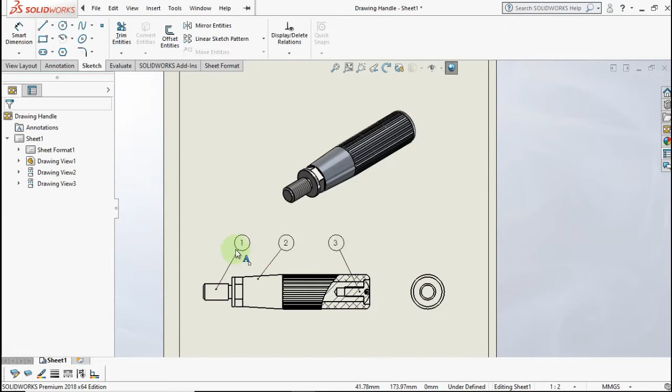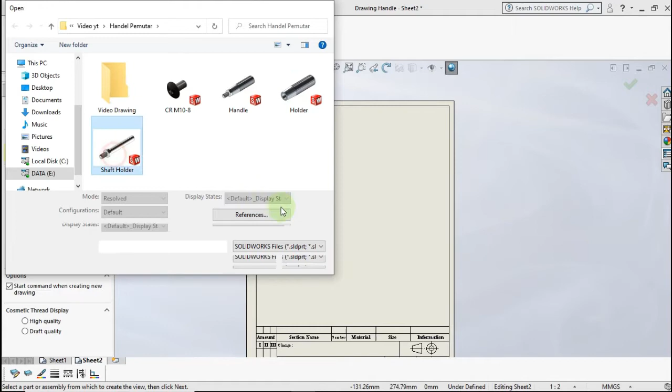In this video, I will show you how to make a spin handle drawing in SolidWorks. First step, make a new sheet. Click Model View. Click Browse. Insert the Shaft Holder. Make the view scale 1:1.

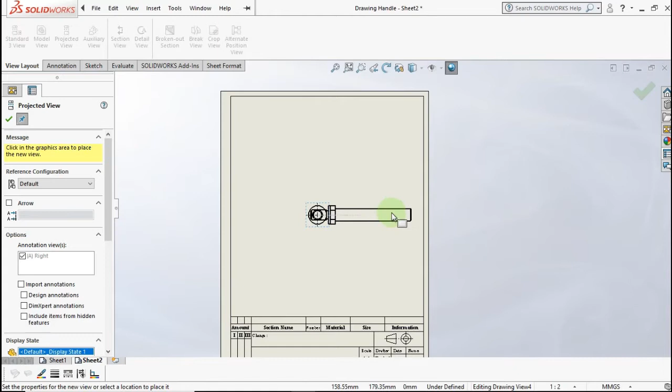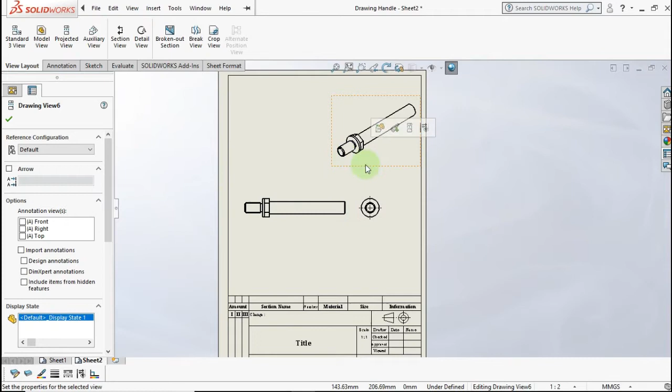Click Front View. Click Right View and Isometric View. Drag the right view to the left of the front view because we use European projection. Click Isometric View, make the display style parameter shaded with edges.

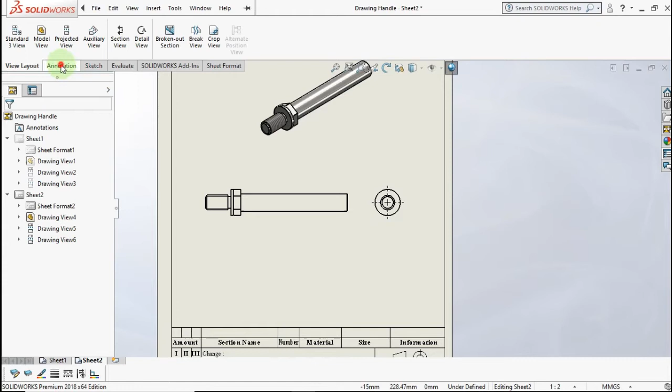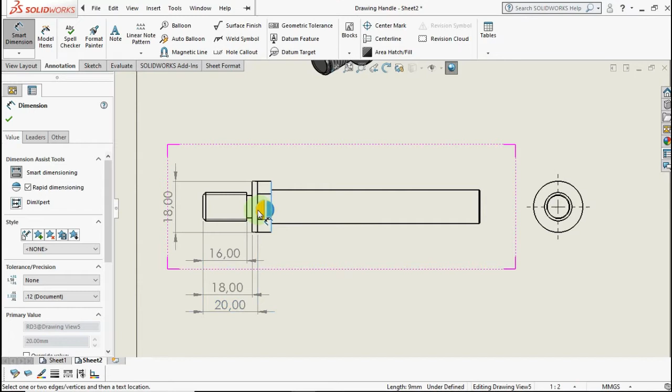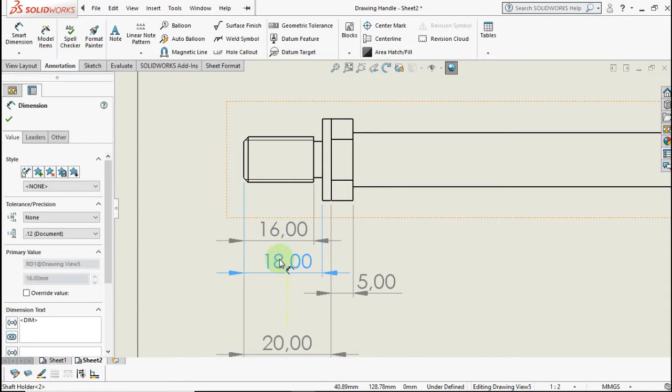Go to Annotation, activate Smart Dimension. Give the size of the parts that need to be dimensioned. Tidy up the dimensions so they are nice to see. Remove the zero after the comma.

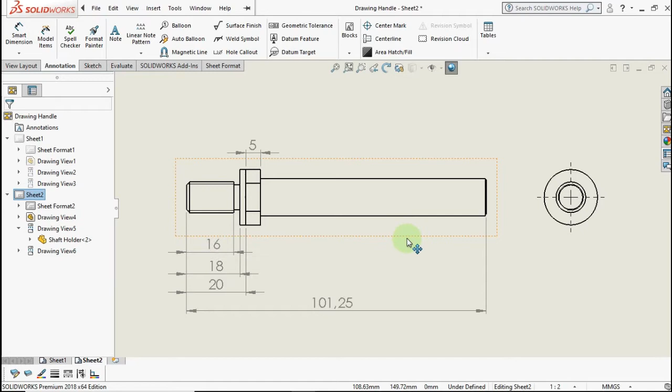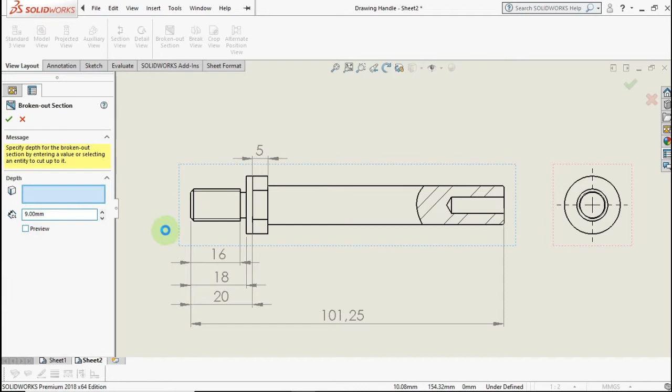After that, go to View Layout. Activate Broken-out Section to see the thread hole. Make the depth parameter 9 mm. OK. Activate Smart Dimension. Give the size of the thread.

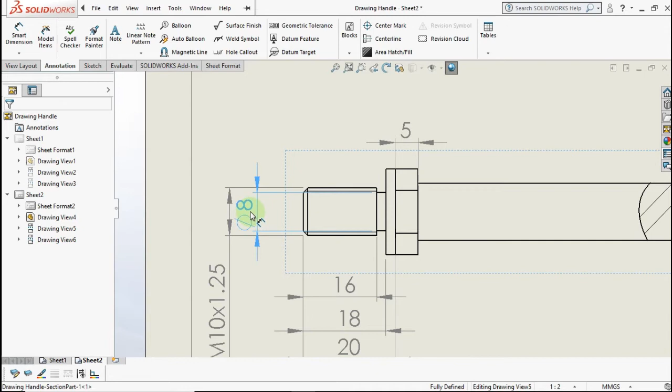Because this part is a thread, we will change the size value to M10 x 1.25. Click this size. Because it is the size of the shaft, tolerance must be given. Choose fit with tolerance. Choose G6 for shaft tolerance. See, the shaft tolerance is showing.

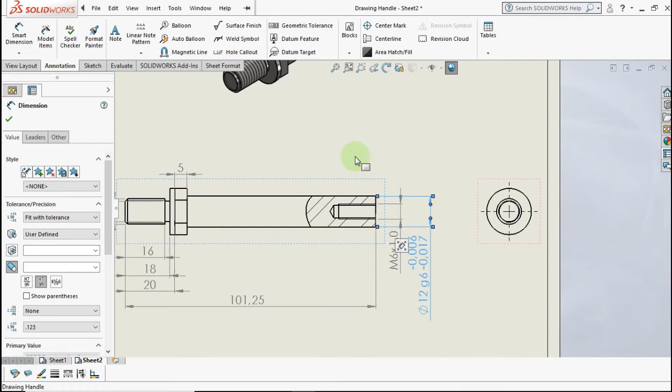Click Surface Finish to show surface roughness. Make N7 roughness. Click the shaft surface. We will change the dimension line color to black.

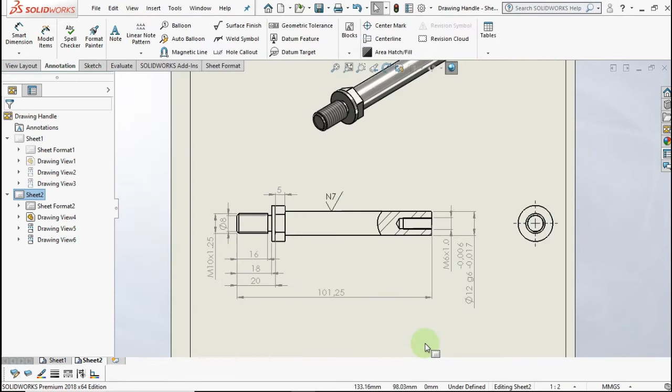Go to Options. Click Color. Click Dimensions, non-imported (driven). Click Edit. Choose black color. See, the dimension line color is changed. Continue to measure again.

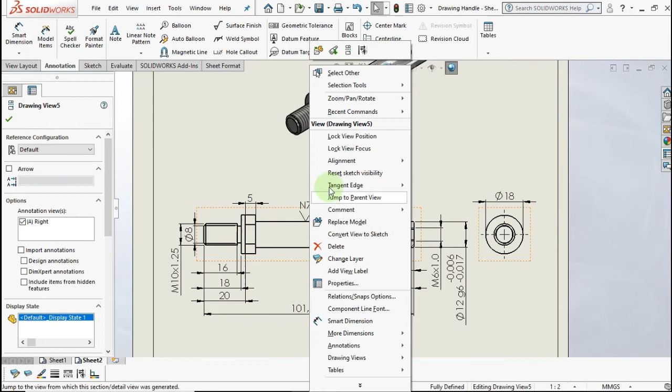Give the size to see the hexagon face. Right click this view. Click Projected View. Drag to the right view to see the hexagon. Delete this view. Activate Smart Dimension to measure the hexagon.

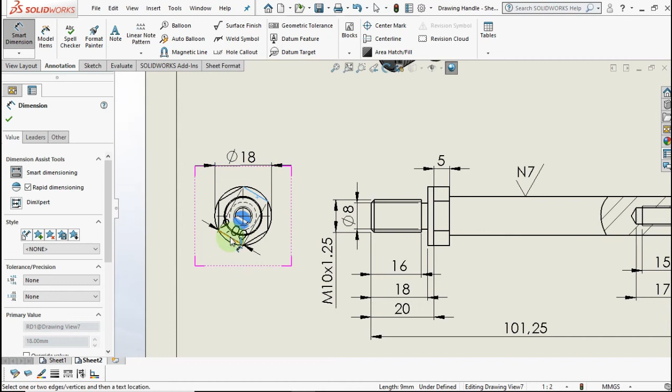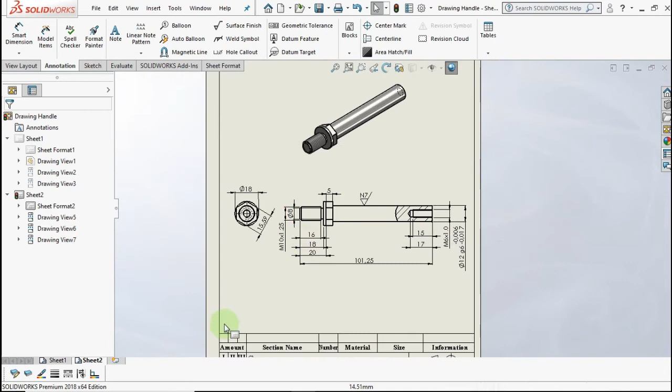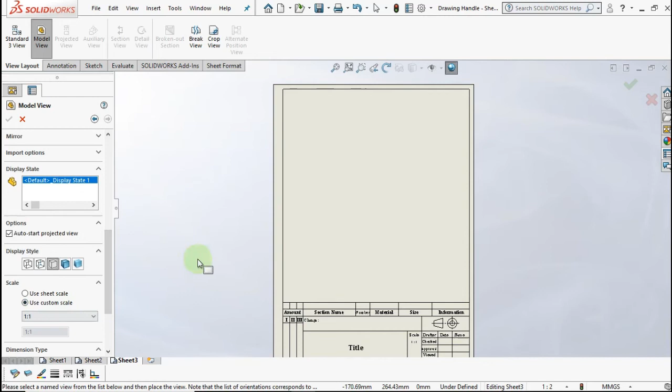After drawing the shaft, now we will draw a holder. Go to a new sheet. Go to View Layout, click Model View, click Browse, insert the holder, make sure the scale is 1:1, click Front View and Isometric View.

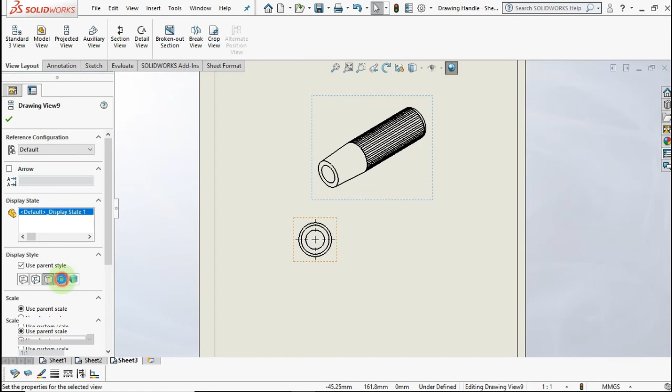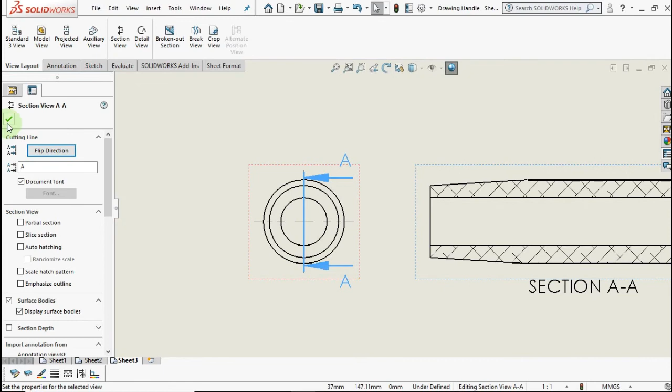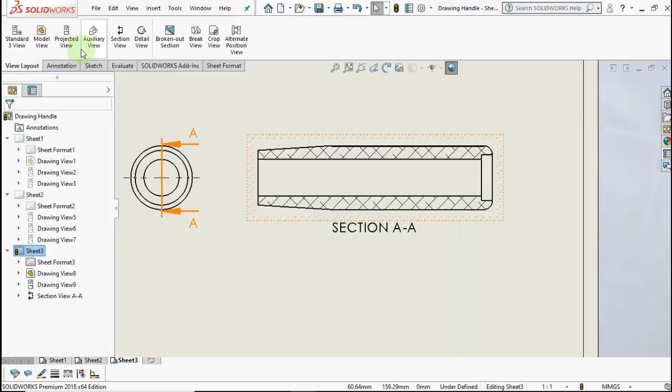Click Section View to see inside the holder. Activate Smart Dimension to measure the holder.

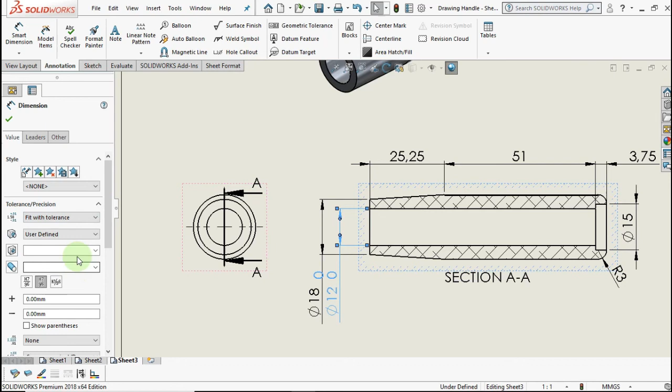Because it is a hole size, we give it a tolerance symbol. Choose Fit with Tolerance. Choose H7 for the hole tolerance of the holder.

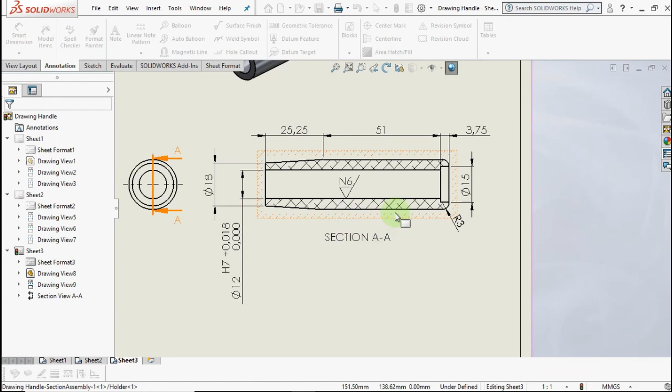Click Surface Finish to show surface roughness. Make N6 roughness. Click the hole surface. Make a note to show the part in the corner.

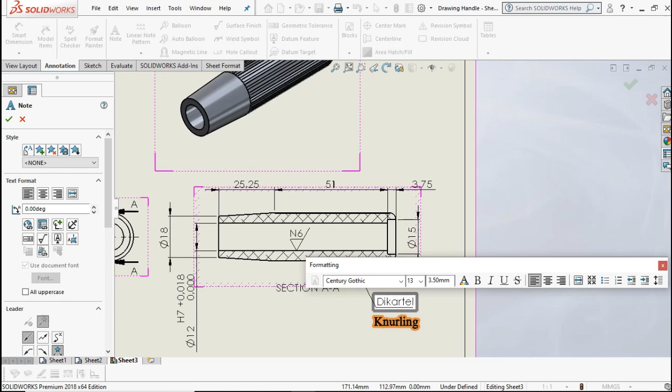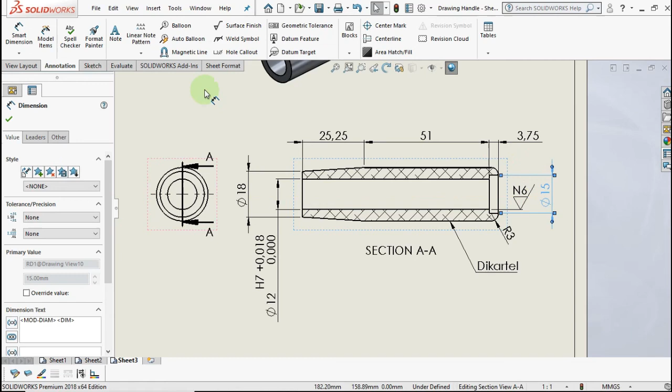If you draw a circular part, make sure you don't forget to add the axis line. Click this view. OK. And this drawing. Click Centerline. Click this view. OK.

I think it's the end of the tutorial.